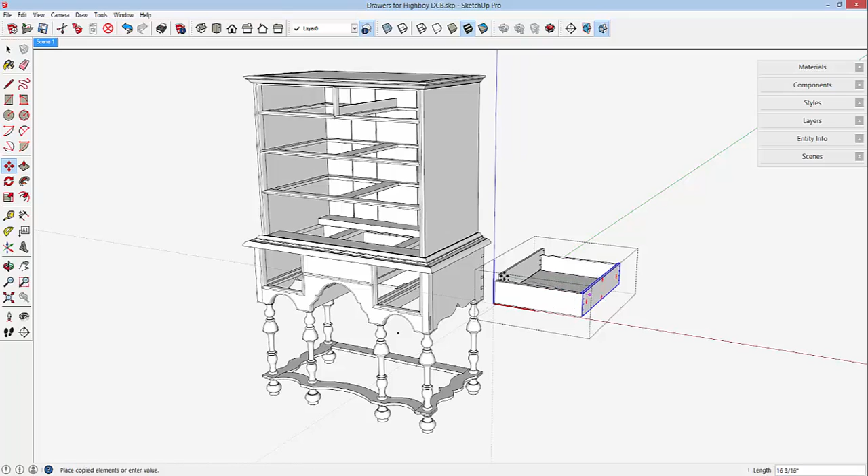And what I need to do is make this a unique assembly and unique components. I'll delete the side here because I need to use this new unique side component so that I retain, as I change this drawer to fit the end, I don't mess up the original and leave it intact. So I'll copy over the side and mirror image and then bring it in to fit.

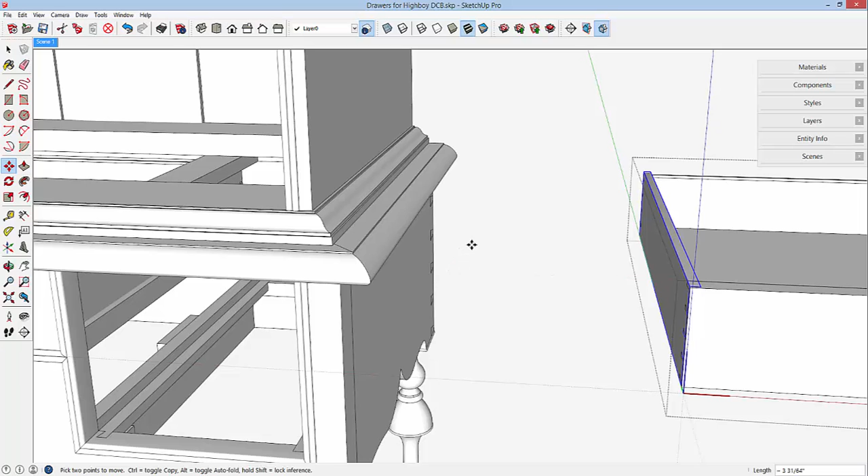So this drawer now is ready to adapt to the end position, and I forgot to make the bottom unique. So I did that.

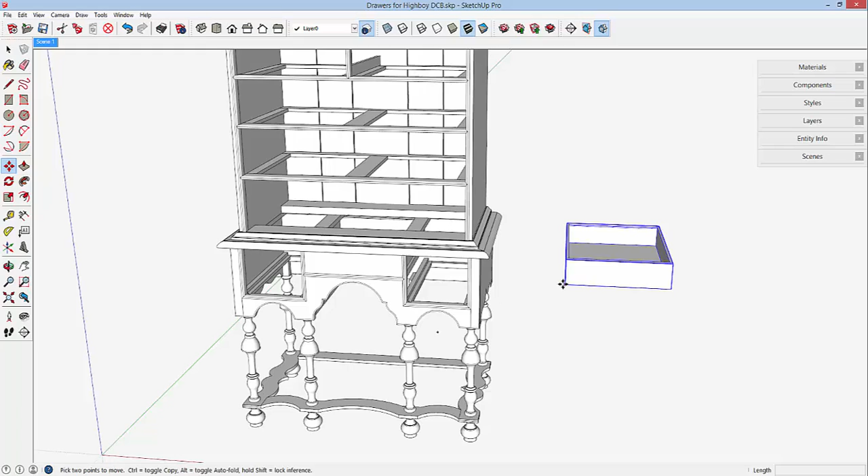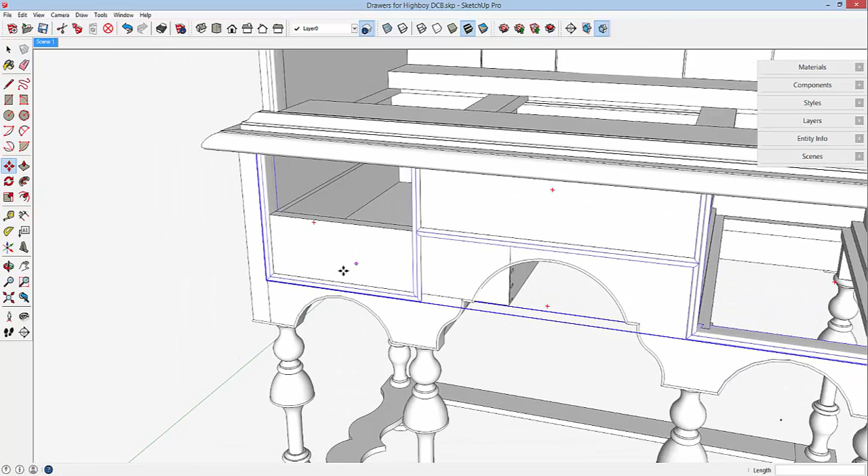Bring the drawer, the new unique component assembly, over to its position in the carcass. I'll zoom in here to make sure I'm getting this in the right position. There it is. And to make it easier to adapt this, I'm going to hide many of the components that make this a little messy. Right click, hide. And that looks better.

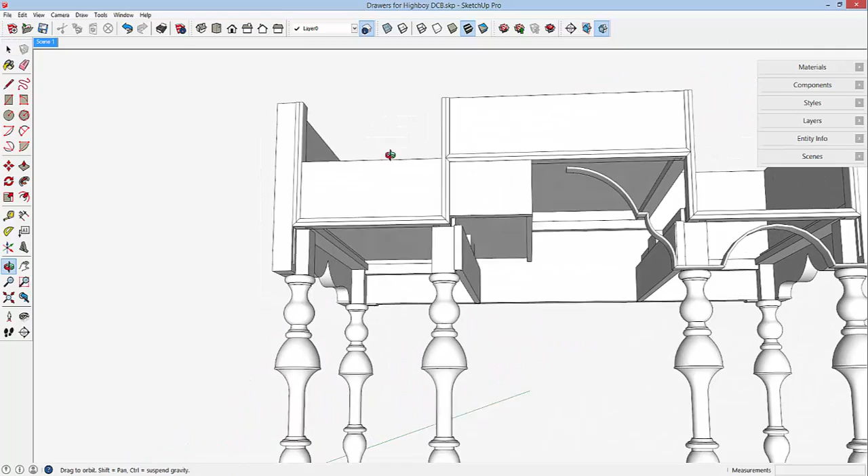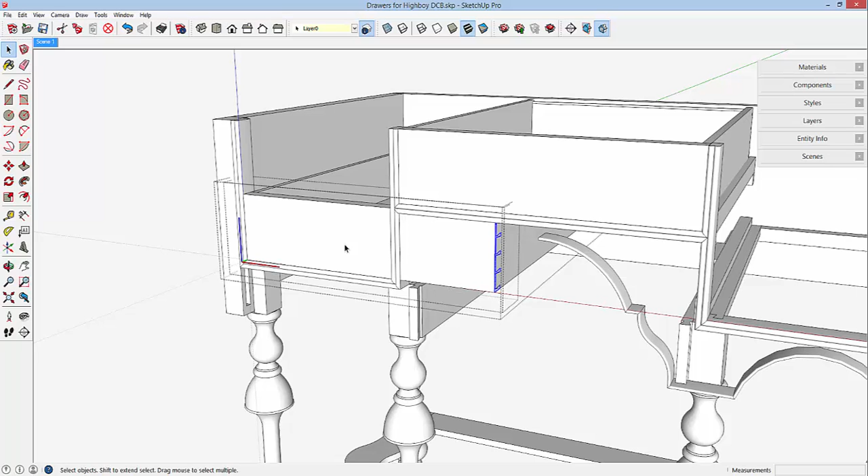I'll start with the front component and modify its width or its length, selecting the... wait a minute, I need to edit the front component. Select all the dovetail joinery, and with the move tool move it over to its opening in the carcass, zooming in to make sure I get this. There it is.

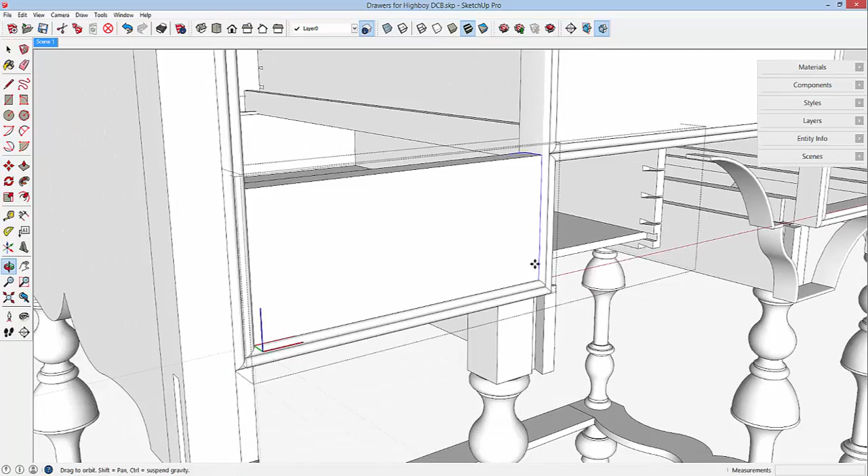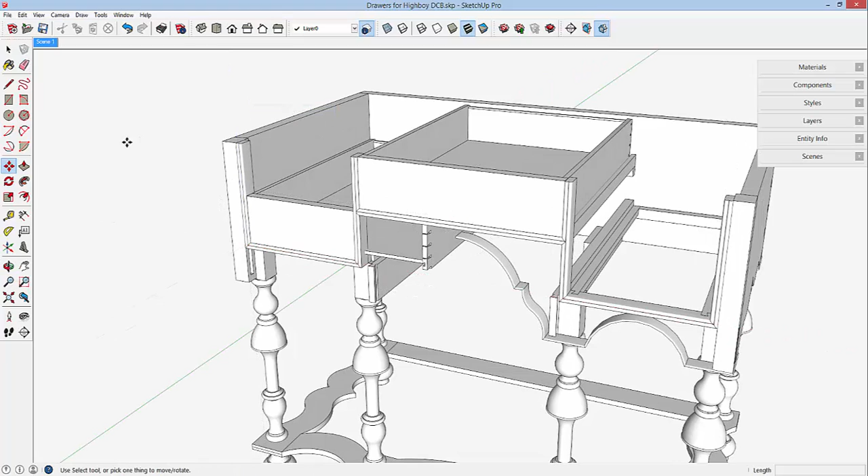I think it will be easier to make the other modifications if I bring a copy of this drawer assembly up above and out of the carcass into clear space. So here's a copy, and bring it up on the blue axis. About here will work okay.

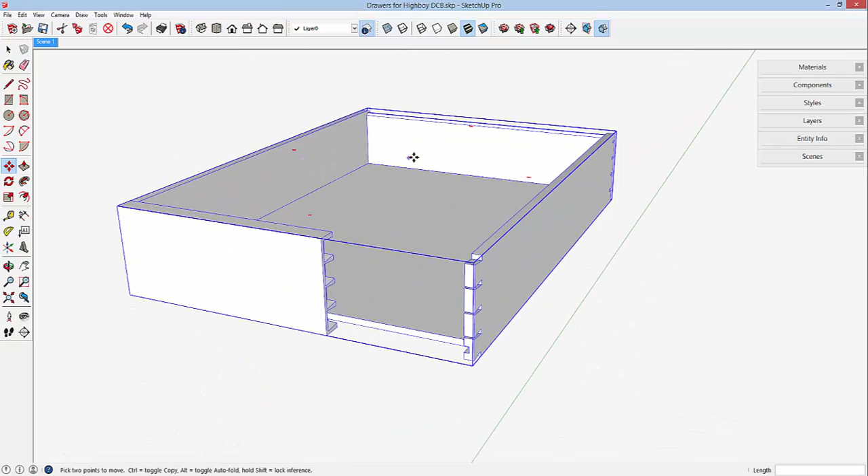And I can adjust some other parts in without the other parts in the way. First of all, moving the side over to its new connection with the front.

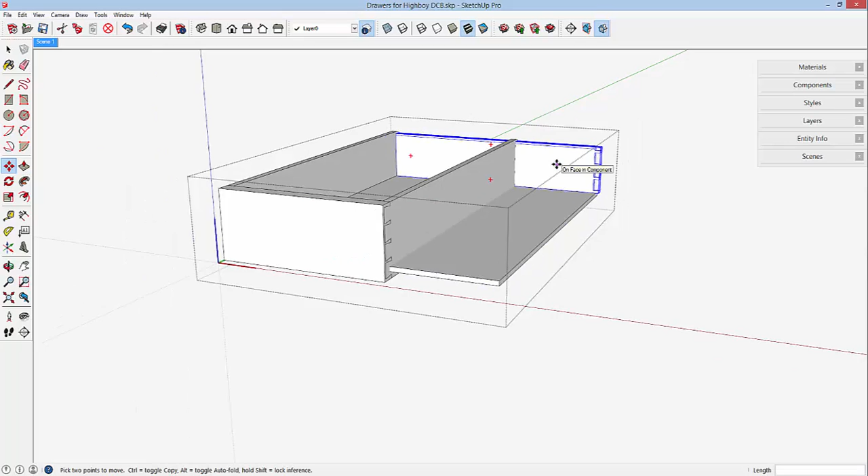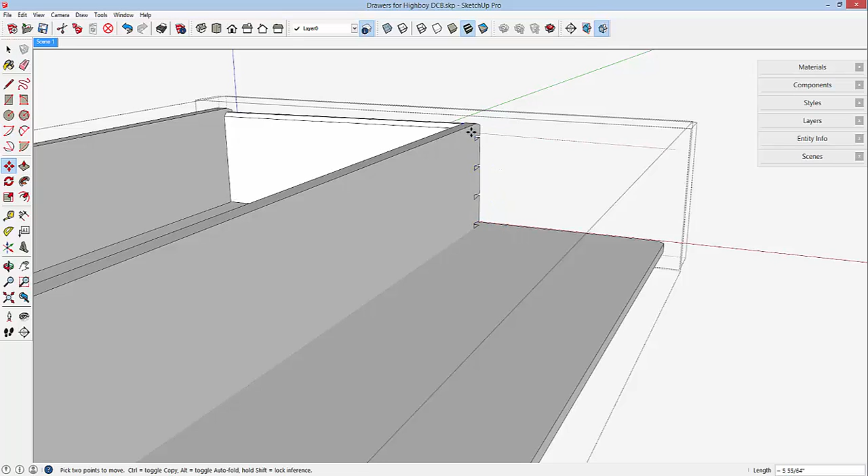Next, to adjust the length of the back component, edit, then select the dovetail joinery, move tool over, and it will help if I stay on the red axis. I'm going to click on, use the right arrow key to stay on the red axis, then I can reference off the face of the side for a correct position.

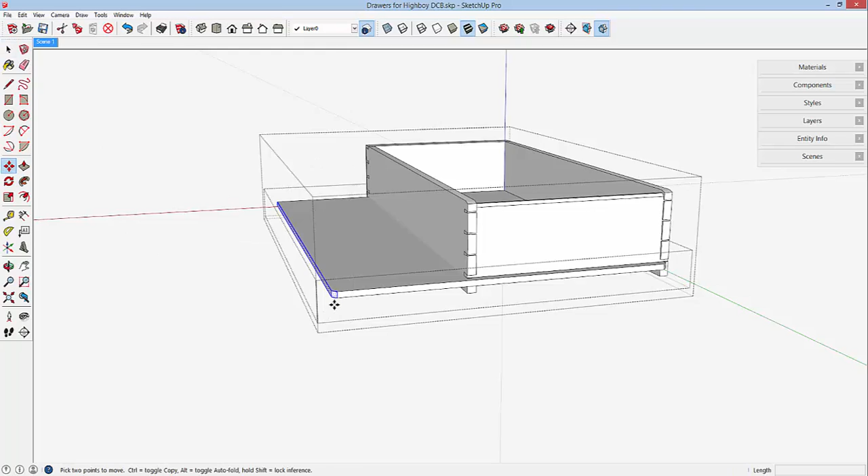The bottom is done in a similar manner. Edit the component, select the edge, and bring that edge over to its position in the groove in the side. I'll zoom in to make sure I get that right. There it is. It looks okay.

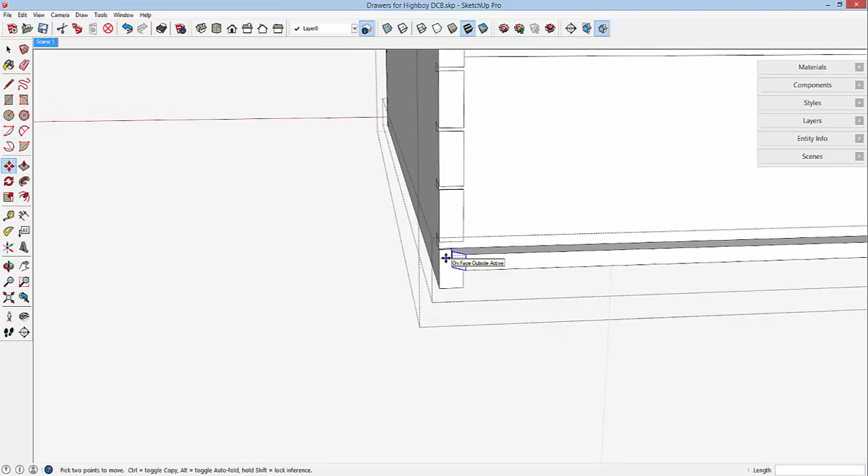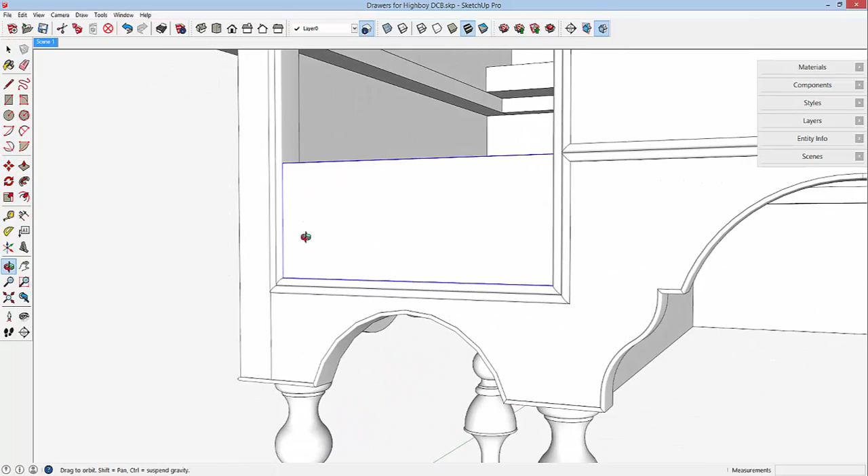I forgot to size up the front. It needs to be taller. The front needs to be fit into the carcass opening. I'll come back to the carcass, edit the component, edit the front component, and...

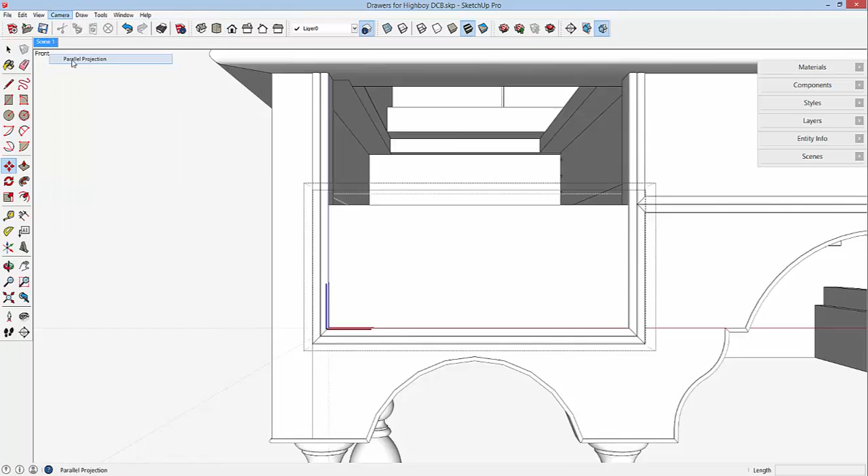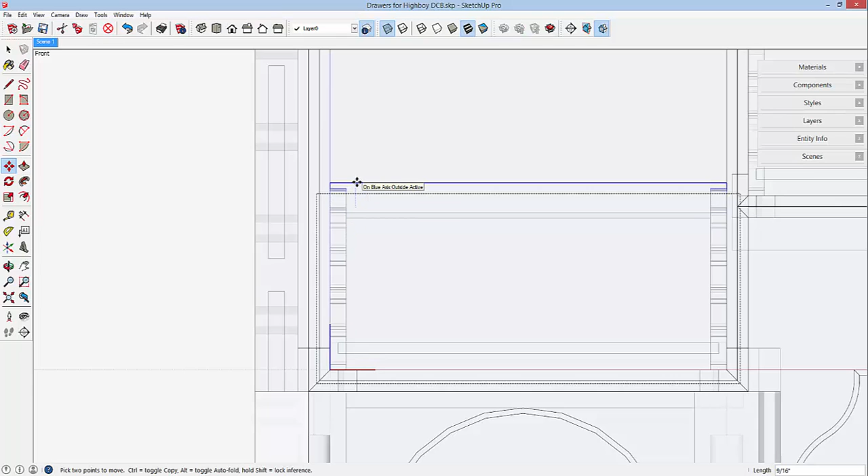I'm going to go to the front view with camera at parallel projection, set X-ray views. I need to select at a good point here. I want to include the top dovetail. Use the move tool and stretch the top edge and the dovetails up to the opening in the carcass, referencing off of an edge there.

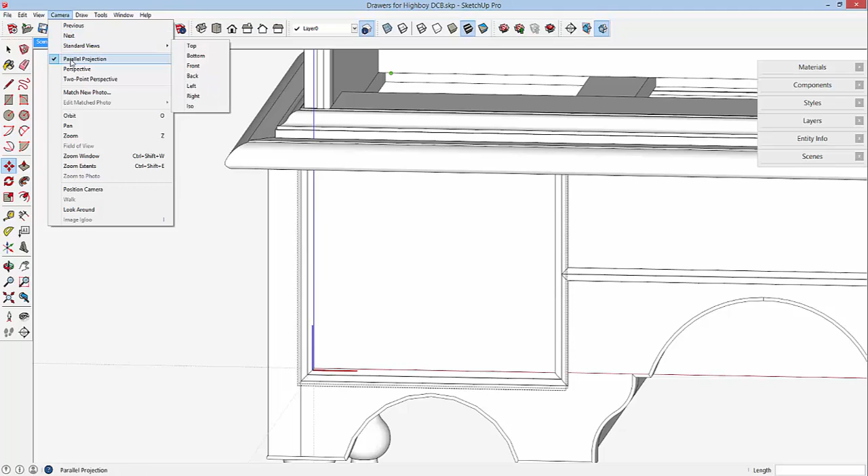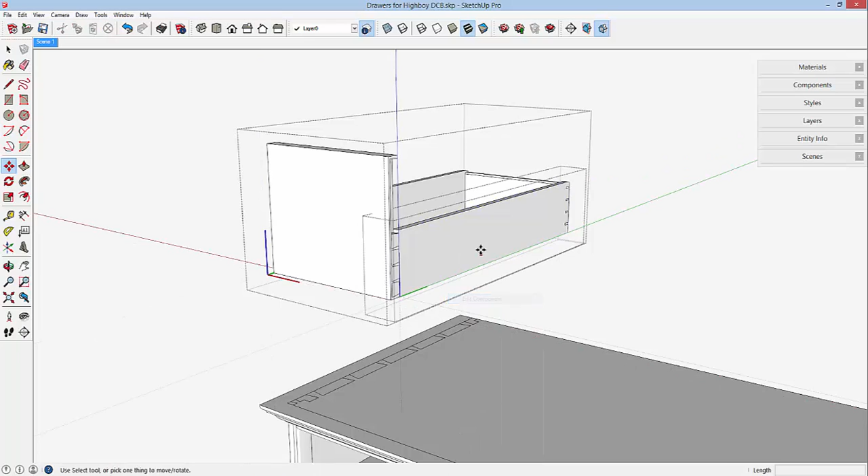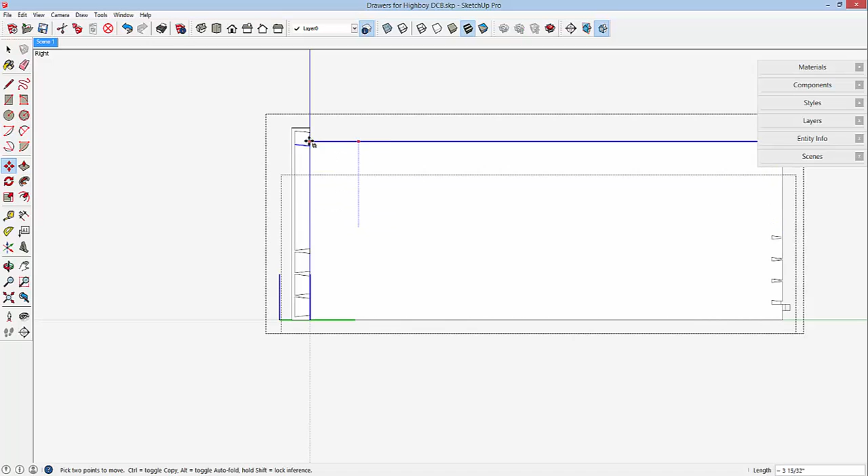Okay, we can return then to the copy of the assembly up here and work on the side to fit it to the new size of the front component. Edit the component, pick a right view in this case, and again a parallel projection. Select tool and pick the top edge and the top dovetail, both at the front and the back, and raise that part of the component up to its exact position aligned with the front component.

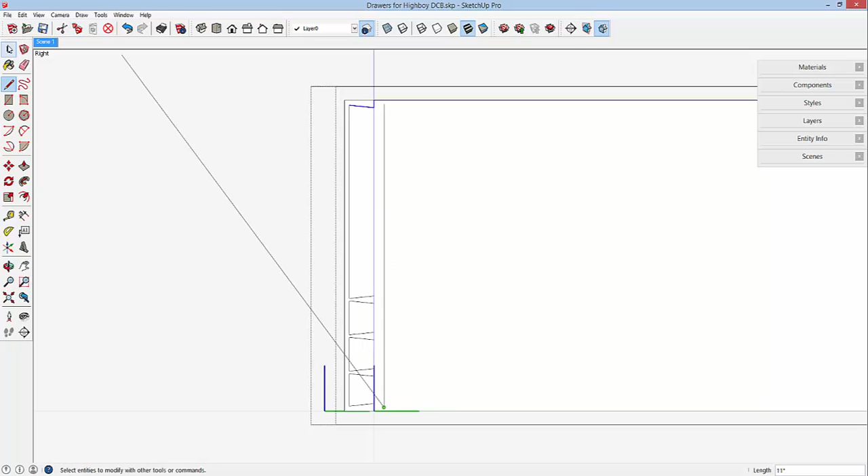As you can see, we've got a dovetail mess here. I need to spread these out. To help me spread them out in a logical way, I'm going to draw a vertical line here that I can use as a reference for the position of the dovetails by dividing that line. And I need to decide how many dovetails are going to look right. I think 5 will work fine.

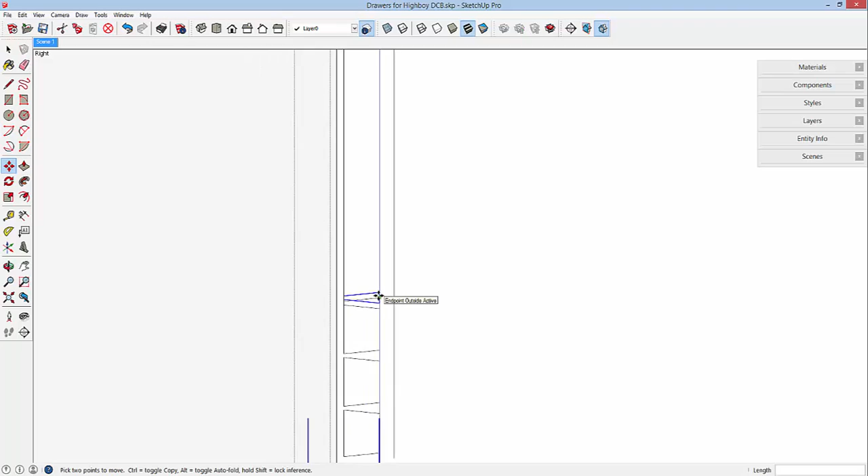So I've divided the line in 5 parts and used the endpoints of those divisions for the position of the new dovetails. Let me grab the midpoint of this side dovetail and click on the upper arrow key to stay on the blue axis and wait for... look for the green. There it is, the end point of that segment. Pick another dovetail, move it up to a new position.

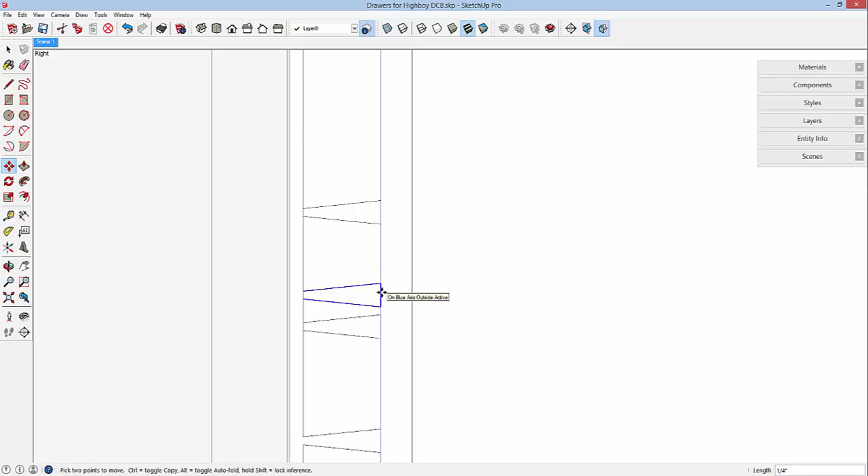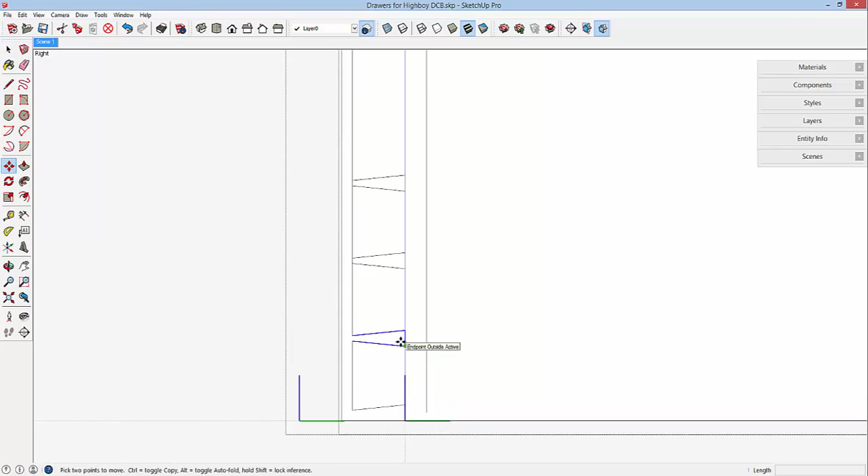Looking for the green dot, there it is. Choosing this dovetail, and raising it up to a new position. Green, click.

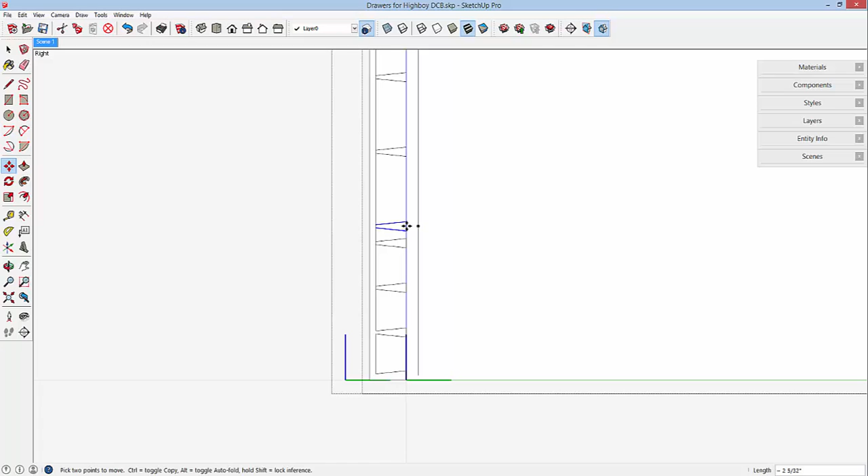Okay, now I'm not sure I've got all the dovetails moved. We're going to have to check this later. I'm going to copy this one down to that position and move then to repositioning the dovetails on the front component.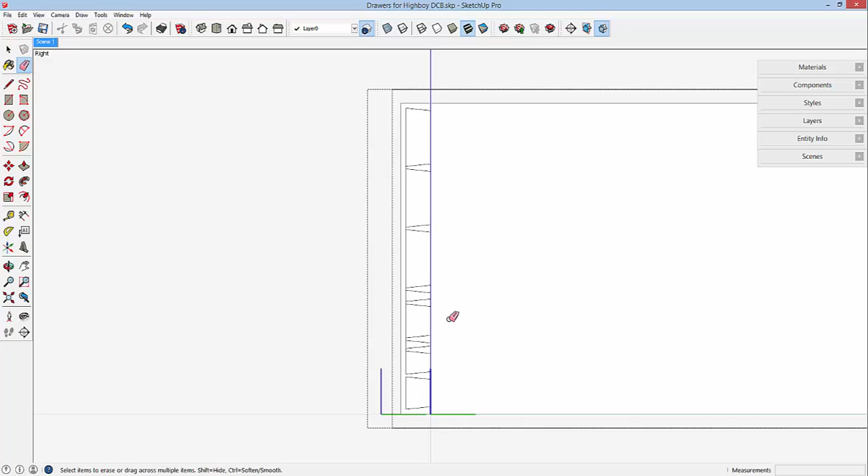I'll delete the vertical divider line, I don't need that anymore. And select the front component for editing. Select its dovetail joints. Need to be careful here. I don't want to select the groove that I know is down there in the bottom.

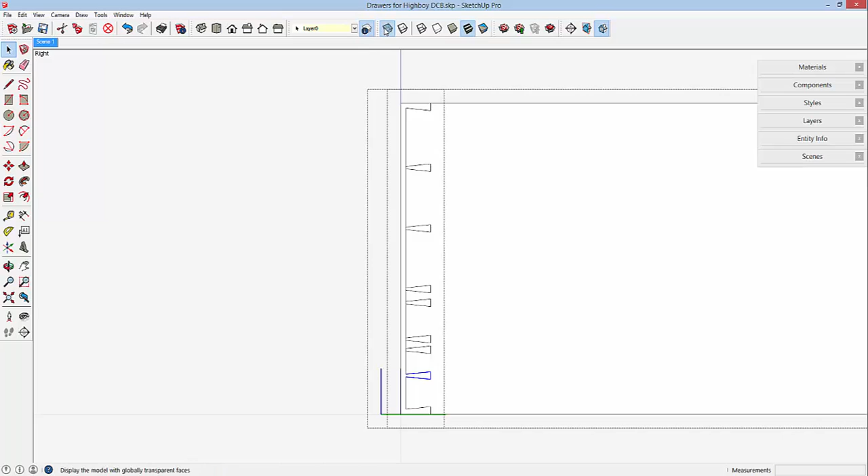Yeah, the X-ray view helps me make sure I've just got the dovetail only, not any part of that groove down there. And move that up to, well, where am I going to move this?

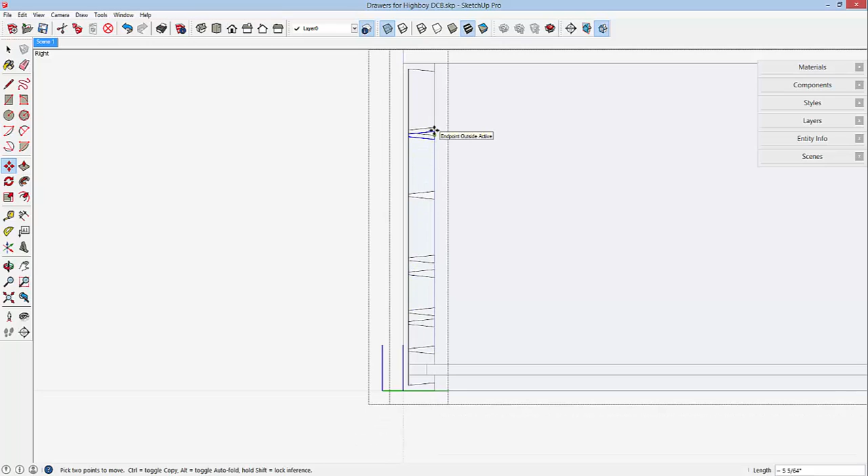I'm going to move this up to the top position. And move it up here. And I picked the midpoint.

That's actually harder. I should have picked the top edge of the dovetail. That would be easier at this point. I had to use midpoint when I was doing the side, but now I can move right up.

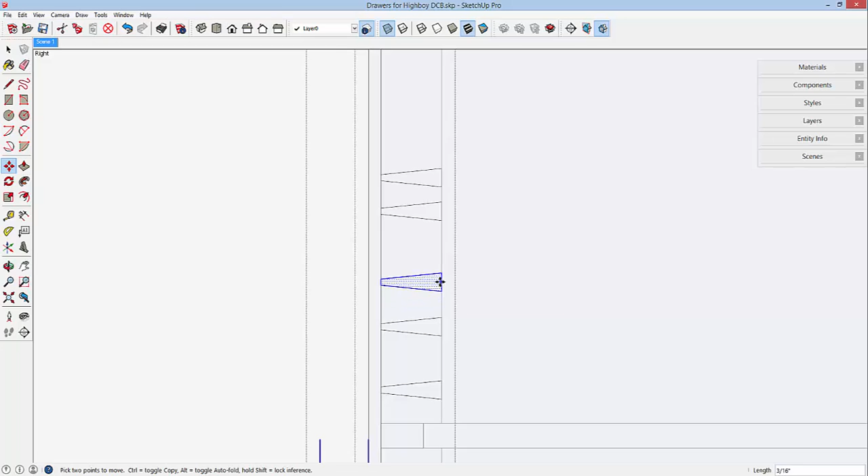Which one is which now? Here's another one that needs to be moved, and there I picked the midpoint instead of the top edge. Now that coincides with the side.

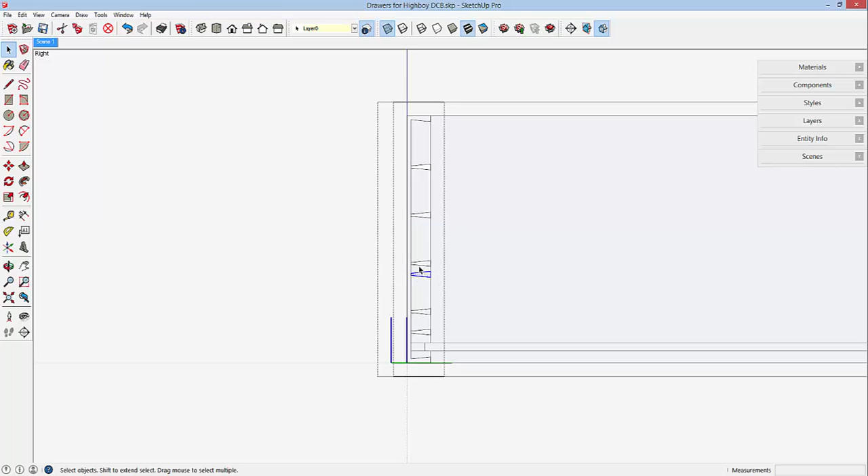Where is another? That one needs to be moved. There, I picked the right corner. That makes it easier. And is there another one? Nope.

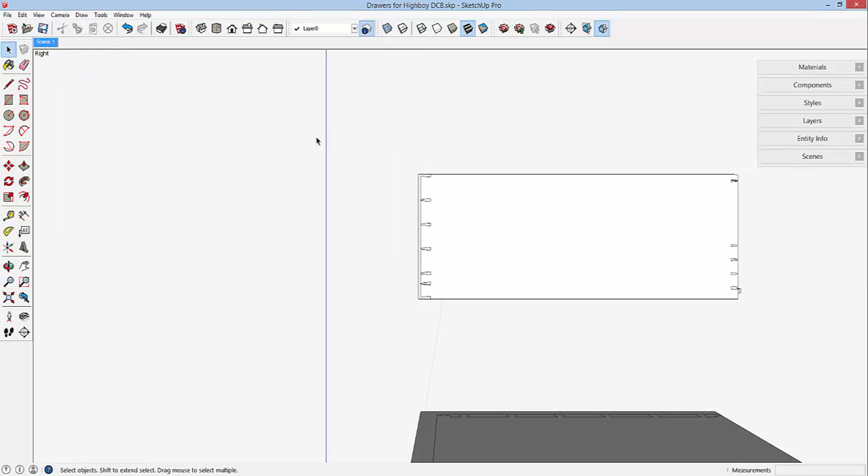But something's wrong, so let me have a look to see why that extra dovetail is in there. Oh yes, I've got a gap in the side down there, an extra dovetail that should not be there. I'll pull a copy out, have a closer look.

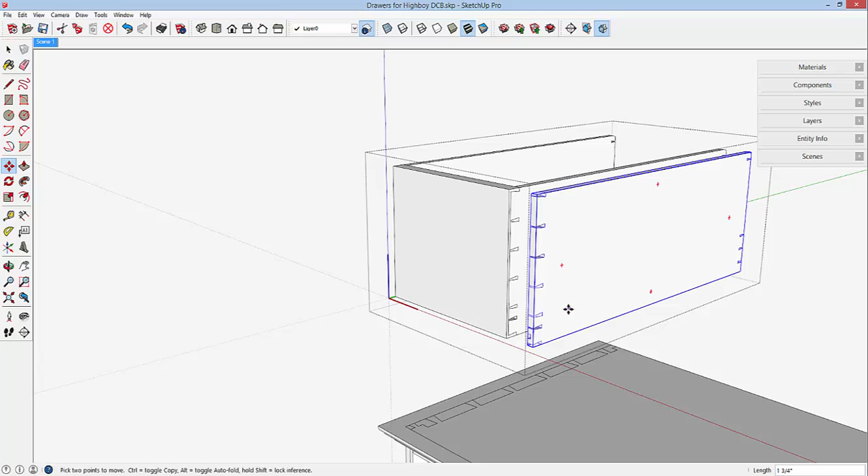And this opening down here needs to be deleted. I'll fill in those edges and then delete all the dovetail edges using X-ray so that I can see the back edges as well, and click with the eraser tool. That looks better.

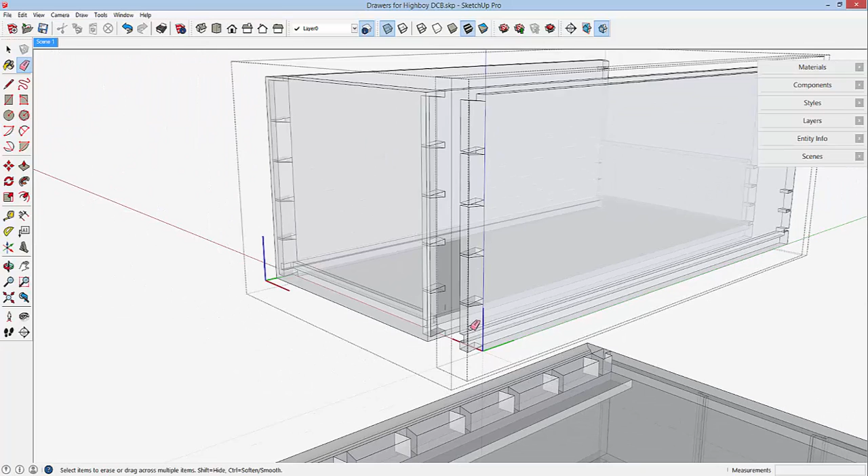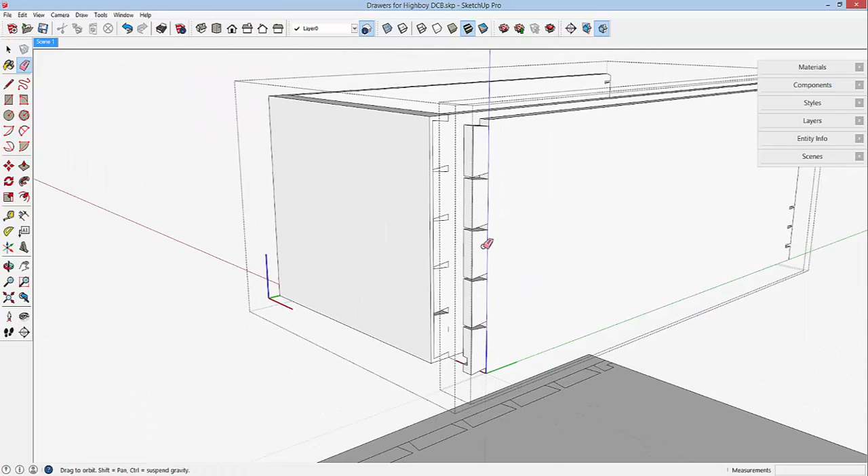However, we need to open up these gaps here for the pins coming from the front component. That pretty much does it. I can delete this side, extra side. I should have deleted that little short line there.

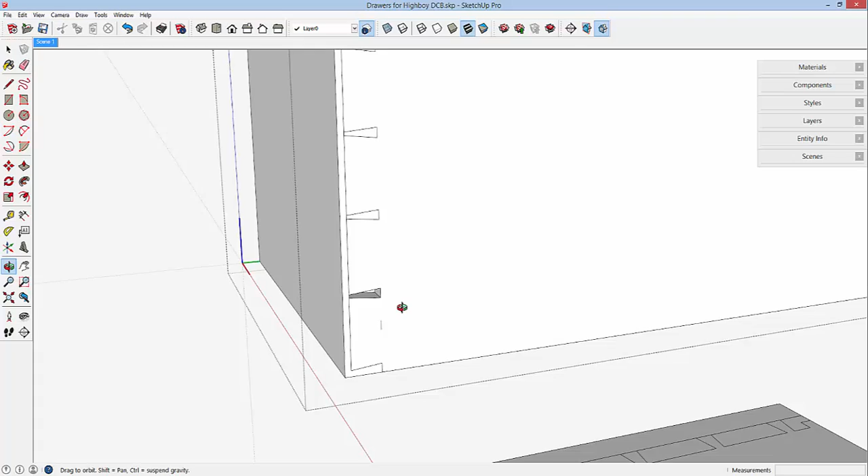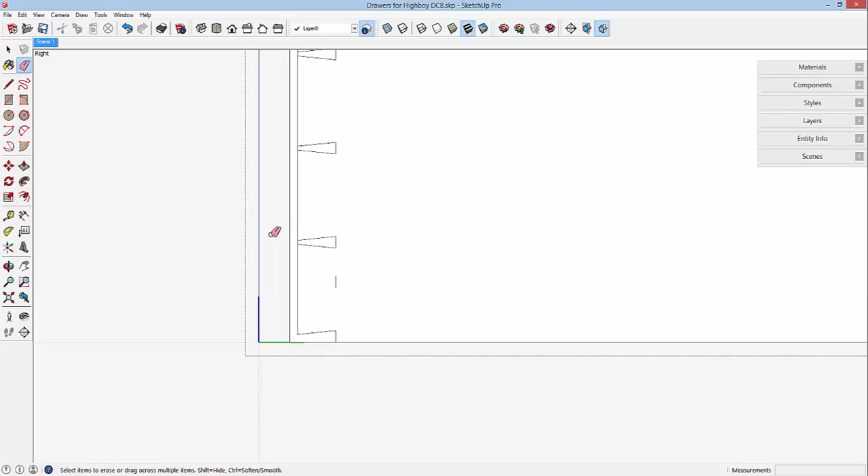I'll get that later. Now I need one of the dovetails from the front to come down to that open position. Again, I will pick the right view camera, set parallel projection, open up the front component for edit, and copy this dovetail down to this position here.

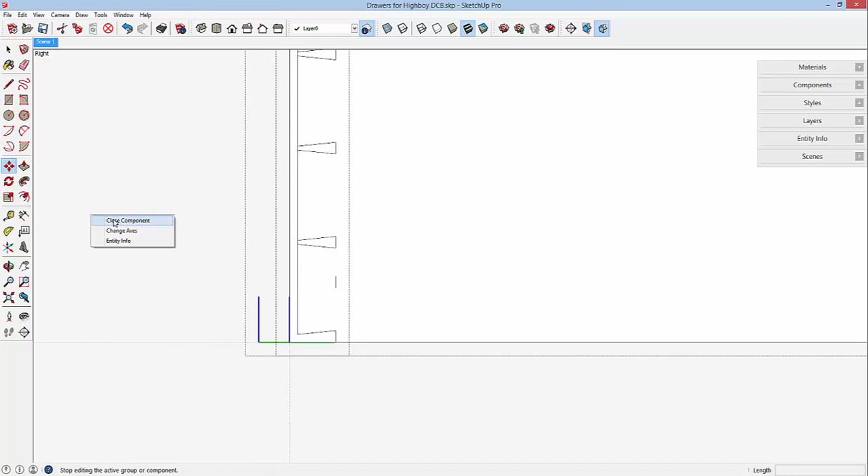Hopefully now both of these pieces are correct. To verify that, I need to bring a copy of the front out and separately for inspection.

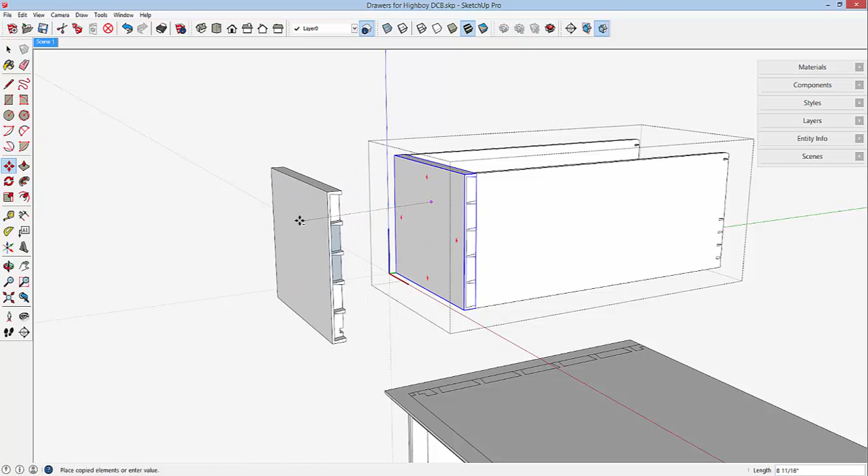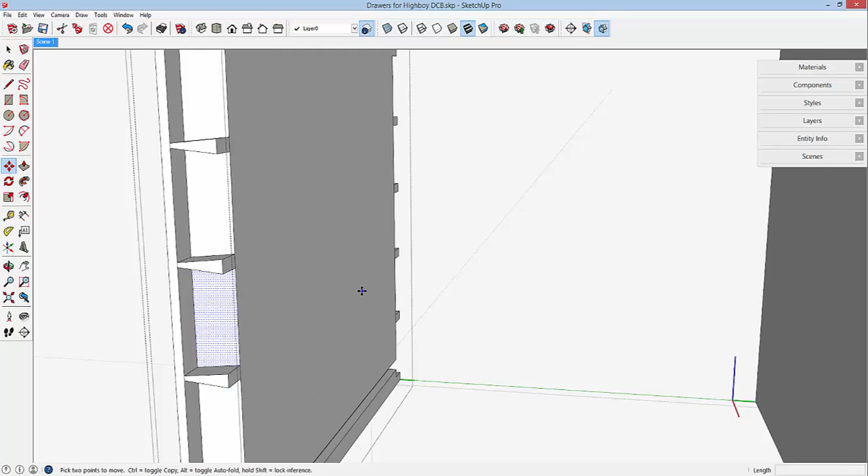Yes, there are some faces here that need to be reversed. Yes, there are faces there, they're just the wrong position, so I'll reverse them. And some edges that need to be deleted.

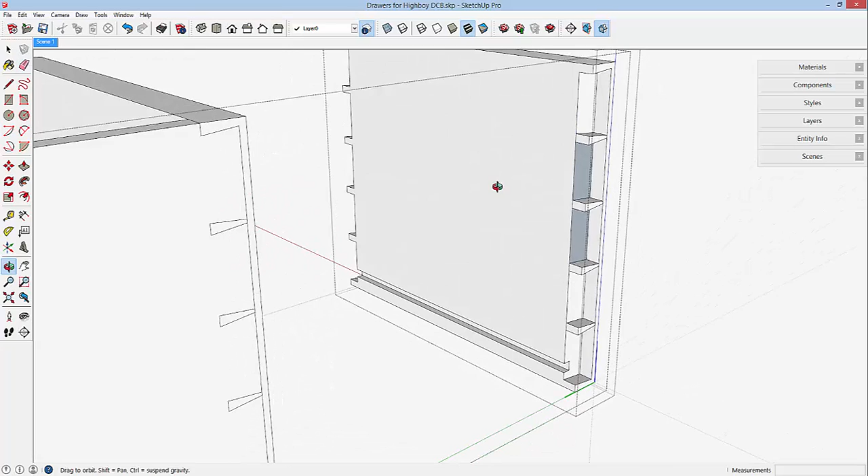Go over to the other end of the front component, reverse the faces. This side of the front, all those dovetails are correctly done because of the way that we edited the component in parallel projection. We were also changing both sides of the dovetails at once.

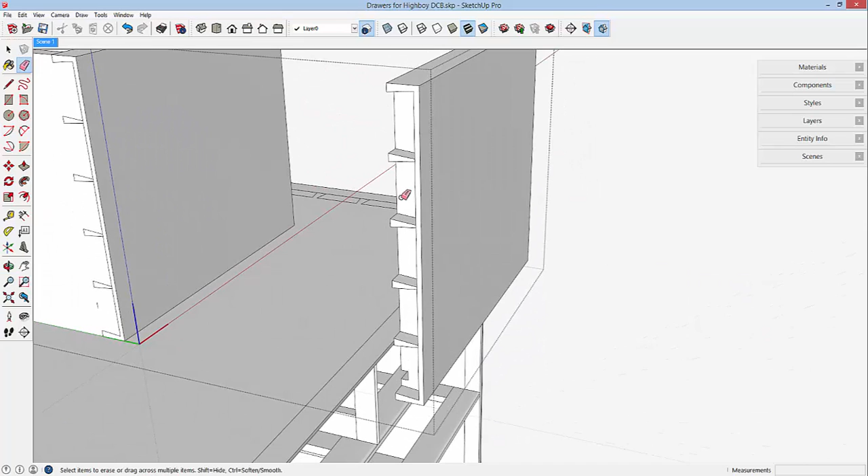I can erase that. And the back dovetails need to be, the back needs to be raised up and the dovetails need to be changed. In the back of the drawer assembly, it's the same process as used for the front.

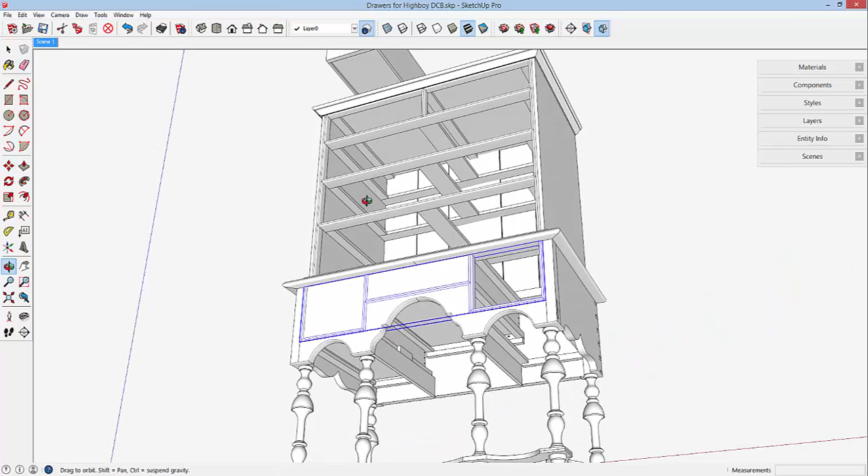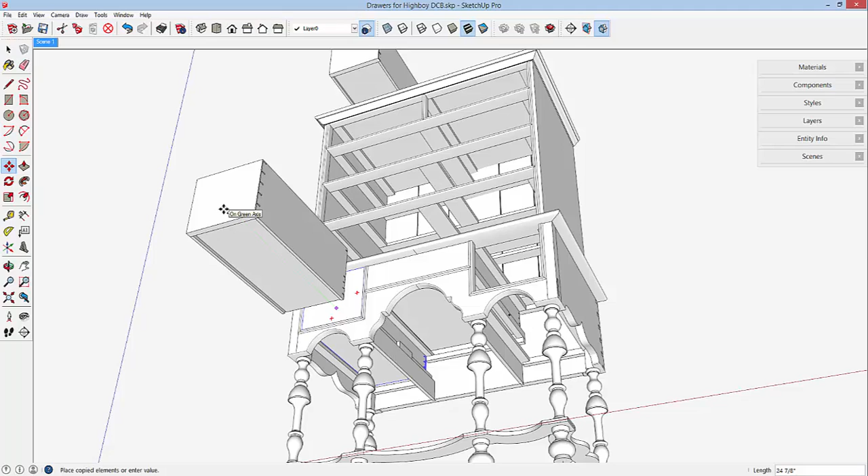And I want to pull this drawer out in front to check it. And let me make sure that I'm picking the right thing. Okay, pull a copy out, and that is equal to what we worked on above.

And it needs to complete the work, the back needs to be edited just like we did the front. I can erase. And that's the way I'll do the rest of the dovetails in the upper half.